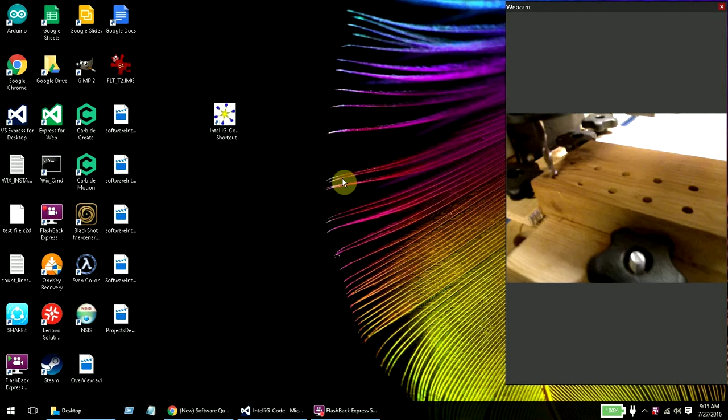I didn't change point A, so it's still right there at the top of the hole. We're going to try the multi-point feature just to verify it's working. Let me show you how fast the program loads. This is the shortcut to it, and it's ready.

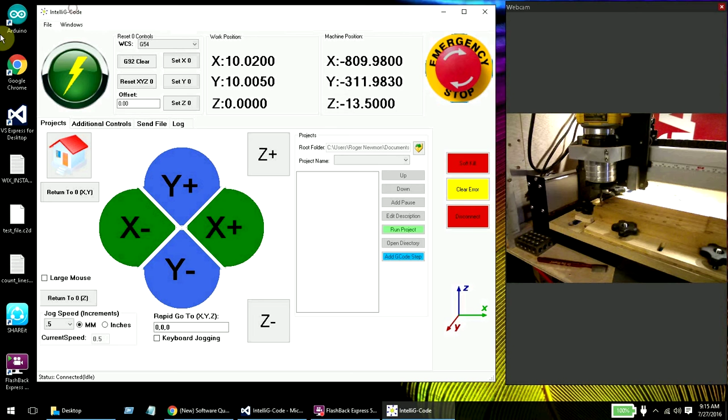I'm going to go ahead and connect, and I'm going to make the window just a little bit bigger here. Alright, okay, so we're connected, and again, I have my wireless keypad here, and when it's in jog mode, you can move right and left, etc.

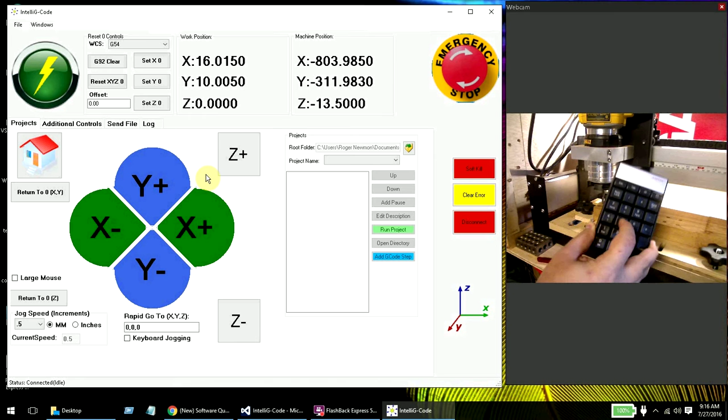Right? But number 5 actually saves the multi-point point. Right now it's not doing anything because I don't actually have the screen open to the multi-point. But if we open the screen to the multi-point, then we can actually use 5.

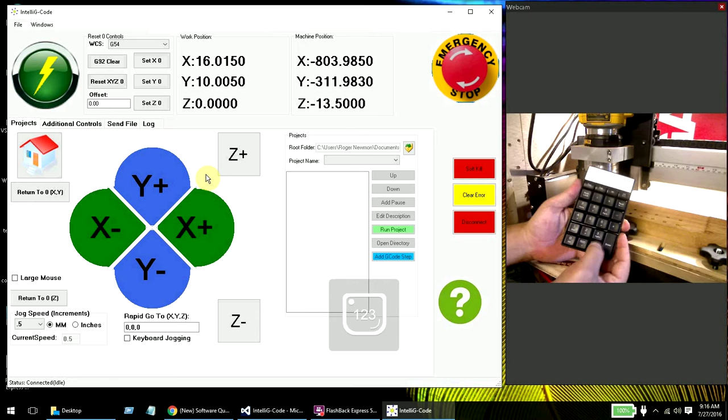Let me go to point 1, which is A. That's the first starting point, and we're going to try to make a crisscross between these points. We're not going to be exact, but we'll get close enough with the multi-point.

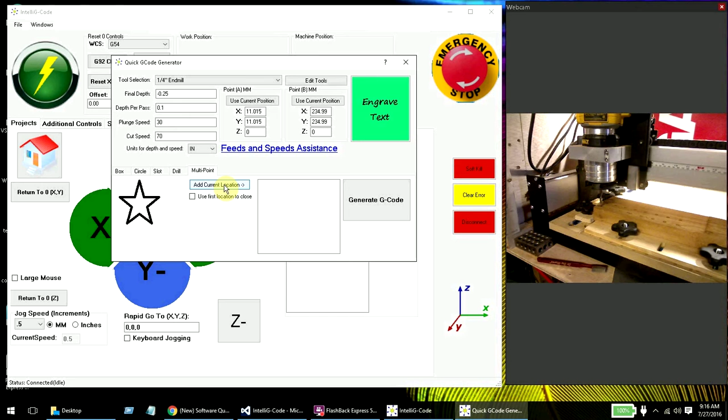So I'm going to open up the multi-point tool now, just like that, and I'm going to go ahead and add this first location here. Okay, so we got the first location there. Now I'm going to move up and right.

To pretty close there. Yeah, that looks like it. All right, and I'm going to hit 5. 5 should save the new multi-point, and you'll see right here added to it.

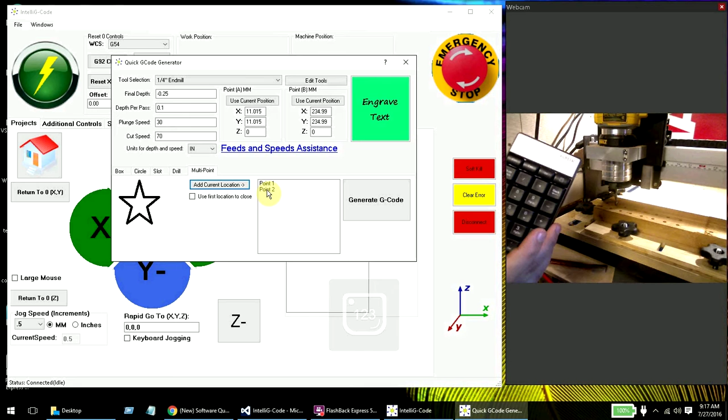Now I'm going to move this way, bottom right. Okay, yeah, these should, since they're all exactly 1 inch, we should be able to just jog this way and this way without jogging right and left at all, because it should be exactly a 45-degree angle on each side. All right, so I'm just kind of eyeballing it to make sure, and that looks good.

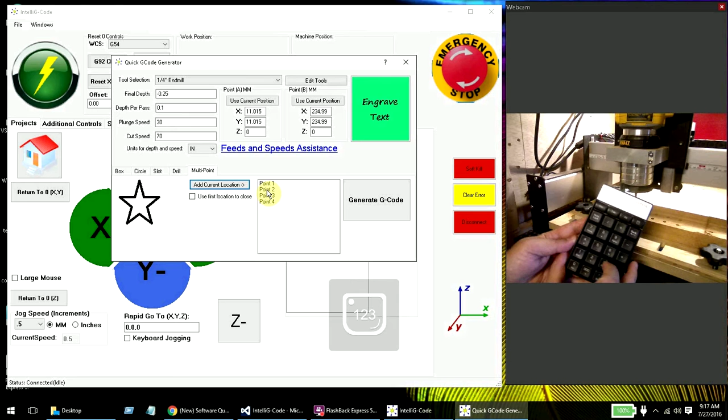So I'm going to multi-point save. I'm going to continue up this way, and that looks pretty close. And we're going to continue down this way. Oh, okay, save that one.

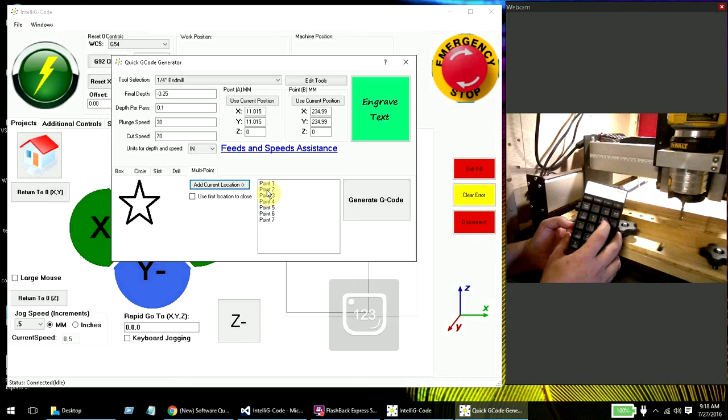Save that one. Save that one. And save that one.

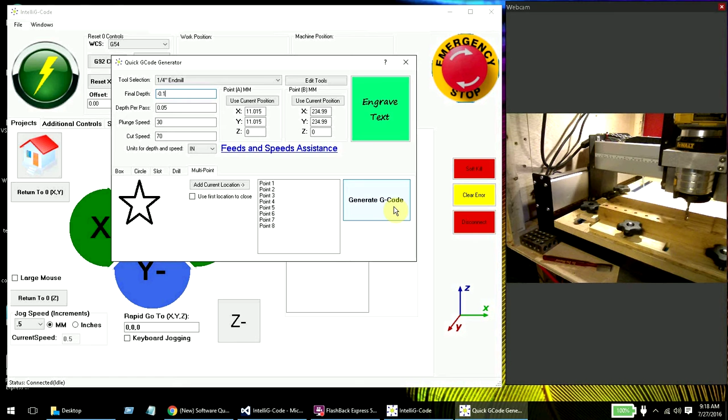Okay, so that's going to be my multi-point cut, and I'm going to make it a 1 layer cut. So I'm going to go down 0.1 inches, and actually let's do a 2 layer cut, but I'll make this 0.05 so we don't cut too deep on the first round, and I'll make that 0.1. That should be fine. Okay, and I'm going to generate the G code, and I'm going to preview it just to see what it looks like.

Okay, and that's exactly what I wanted. If this is a 2-pass, as you see, it's going to start here, going to continue down. When it gets to the end, it will go down another depth, which you can barely see, but it is there. And then it will come back and retrace the lines.

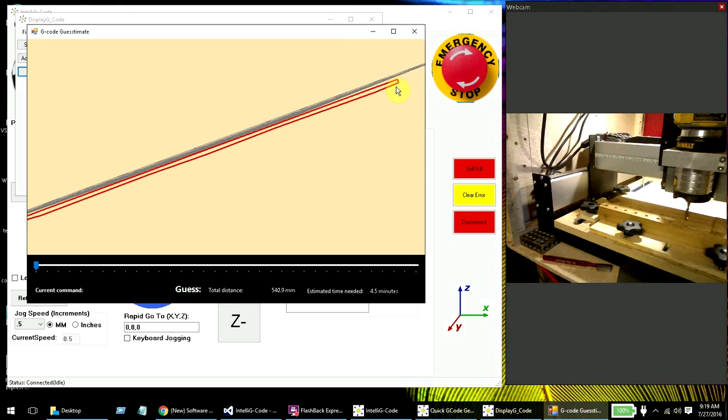Okay, so that's pretty much it, and I'm going to go ahead and just run this now. Let me turn on the router, and then I'll click send.

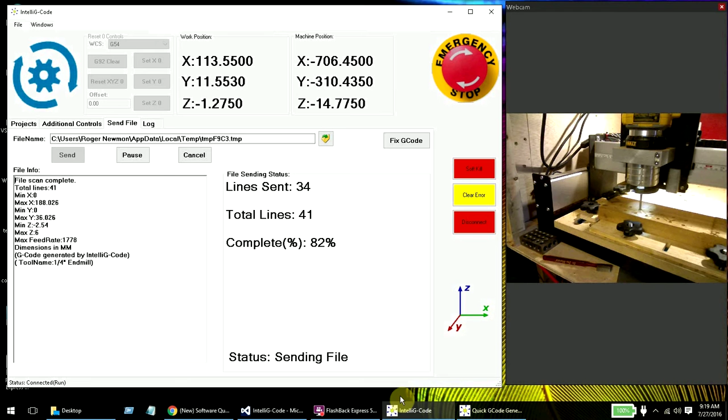Okay, so what happened? Two things actually happened. Number one, point A - since on the first project we drilled the holes and then resurfaced, Z0 was at the top of that resurface, and point A was supposed to be at 0, but I never re-zeroed since the surface. So actually, point A was above the wood. So on the first pass, it actually went down without doing anything.

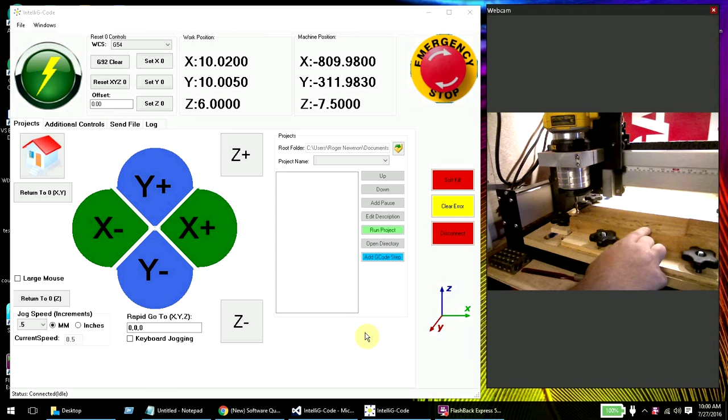It was cutting air, so to speak. And then when it came here, it actually continued back this way, and then it stopped about right here because the stupid recording software that I have locked up the computer. It's not the first time that that's happened, but after I was able to kill the recording software, my software was actually able to finish the cut.

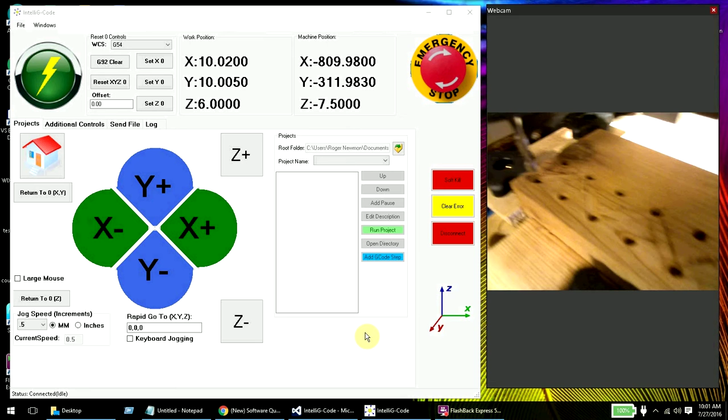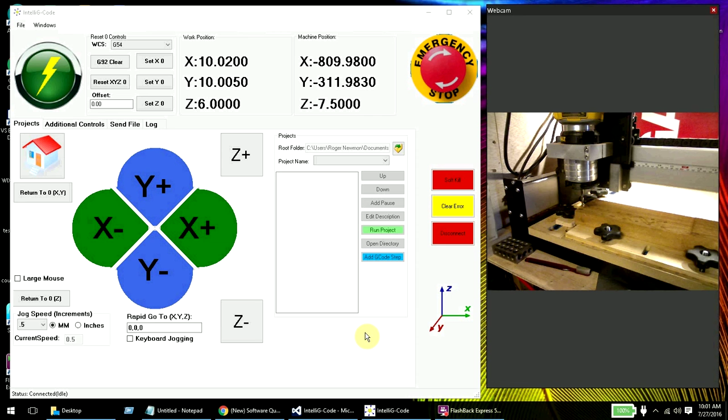So I just wanted to show you this is what it looks like, and this is just an example of what you can do with multi-cut. If you had a pattern that you wanted to create or trace, you could put that on the board and just go around and mark all the points and then set the depth, and it would actually cut that out. So that's just a quick demonstration of what you can do with the multi-cut option without having to program or draw anything. It's just a way to trace a template on a piece of wood.